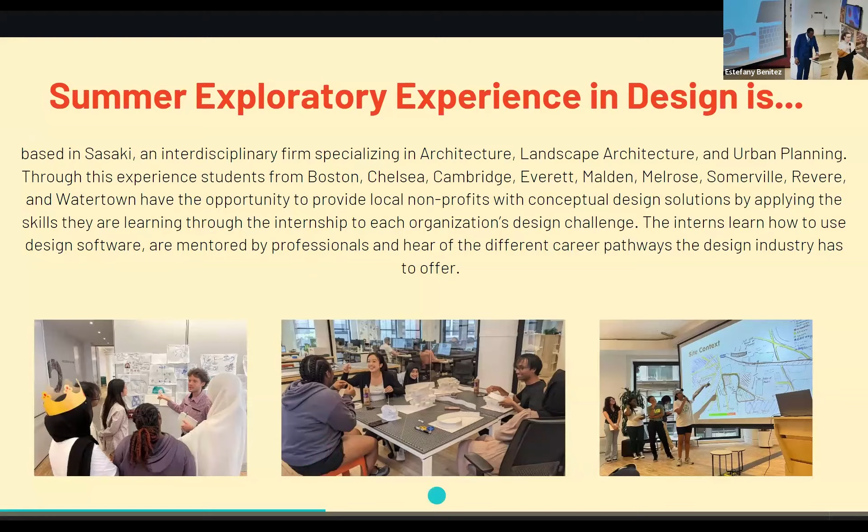I will say this one thing before we get going. You've put in 6 weeks of really, really hard work. The work is done. You have given the time, you've given your effort. I expect many of you, maybe a lot of you, are nervous right now. That's okay, that's good. It means you care. It means you're passionate about what you've done.

But I want you all to know, when you get up here and present your ideas, this room is full of people excited for you, and we are here to celebrate all of those ideas. So let's take a collective breath and let it out, and then you're all going to crush this. I'm really excited to see everything that you've thought up, and just know everyone here is cheering for you. So good luck, and I'll hand it off to Estefany.

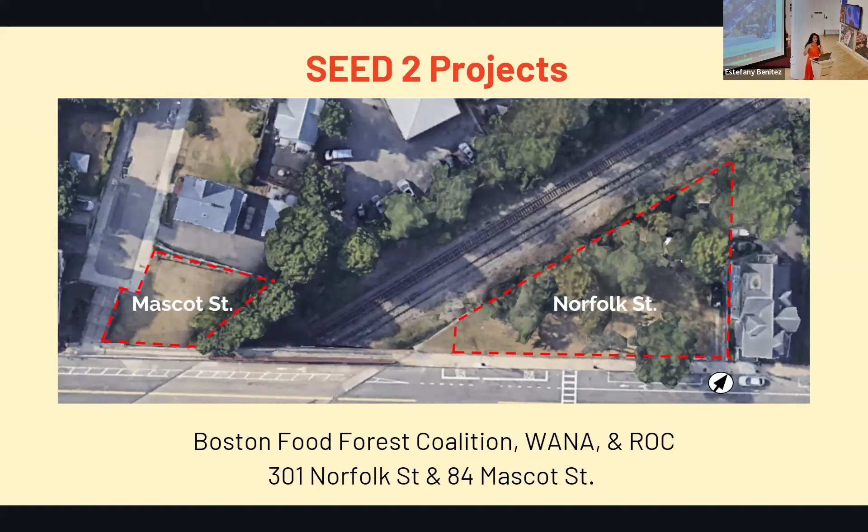For SEED 2, we were working with Boston Food Forest Coalition, WANA, and ROC on a food forest that they've already done plenty of community engagement for. So the students took their design and took it a step further. What you're going to see from the SEED 2 students is a more advanced and amazing design, bringing to life what the community had asked for.

The project advisors that helped here are also professional designers, architects, landscape architects, and urban planners who have worked here at the firm for many years and are super enthusiastic and excited to work with our youth and teach them everything they know.

Without further ado, we're going to move on to the presentations. I'll have Alexis come up and set them up. We're going to begin with Team Marigold. So may Team Marigold make your way up here.

Good afternoon, everybody. This is our final presentation for the 7 Acre Park. We're Team Marigold. My name is Amelia, I'm from Everett and a rising junior. Hi, I'm Emma, a rising sophomore from Malden. Hi, I'm Jasmine, a rising senior from Somerville. I'm Nee, a rising sophomore from Boston. I'm Felix, a rising junior from Cambridge.

A little bit about our site: before it was a dog park, it was used to repair and make World War II planes. So the soil has a lot of contaminated soil, heavy metals, and chemicals. There is a soil cap 4 feet under the soil. A soil cap is basically a tarp that lays between the contaminated soil and the clean soil, keeping them separate.

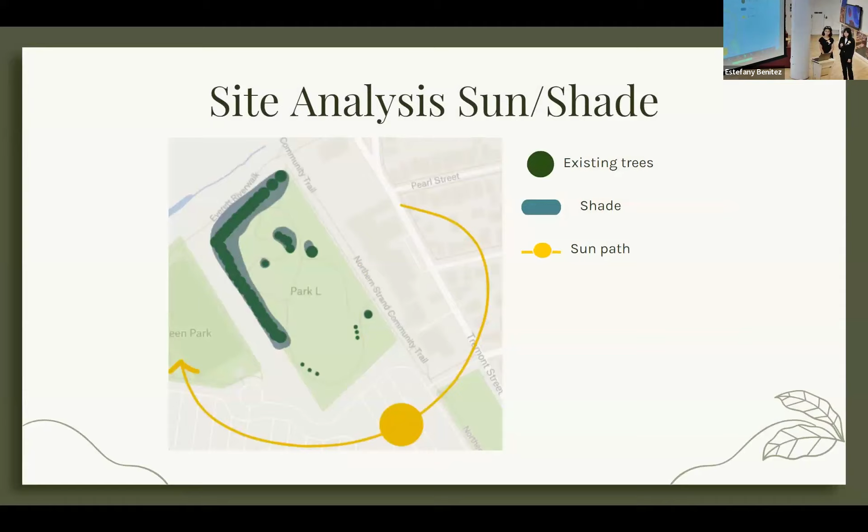For our sun and shade analysis, as you can see, the existing trees don't provide much shade for the park, and the park gets a lot of direct sunlight all day. This is a big reason why people don't want to come to the park.

Using our analysis, we created a design that will hopefully address the problems and goals that we found.

We're going to add 3 new pavilions in the park. The big one in the center, shaped like a dog paw, is our community space where people will gather, host events, and connect with each other. We're also going to have two small pavilions on the side, which are more private areas to sit and relax. On the other side, we'll have a big fenced area for unleashed dogs, and leashed dogs can walk on the rest of the park.

We're going to add two new entrances, one leading to River Green Park and one leading to the parking lot, for easier access to the park. We're also going to add a rain garden to help with the flooding. Overall, we're also going to add more amenities like more trees, more benches, more water fountains, etc.

This is our paw pavilion, which is our central community space. We wanted it to be made out of materials that were durable and would hold up outdoors. So we used oak wood for the base and the roof of the pavilion, and for the outside walls we used aluminum, which is also used for the pillars.

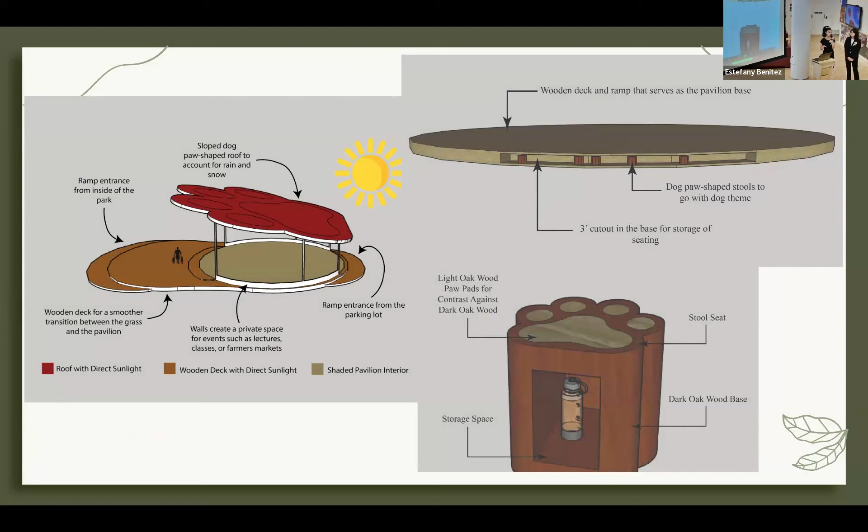At the front of the pavilion, there's a ramp that's also an entrance, so there's a smoother transition between being on the grass and being under the structure. The roof is also sloped so that rainwater can easily flow off of it and it provides more shade. At the base of the pavilion, we have a cutout storage space used to hold dog paw stools that we plan to use for large events in the pavilion.

This is our smallest pavilion. Although it is the smallest, we still wanted it to have a cozy, open feeling. As a whole, we wanted to add more green space to our park, so we added some greenery in the actual pavilion. All the pavilions will have a slant to deal with weather conditions, and this is what we envisioned the furniture to look like.

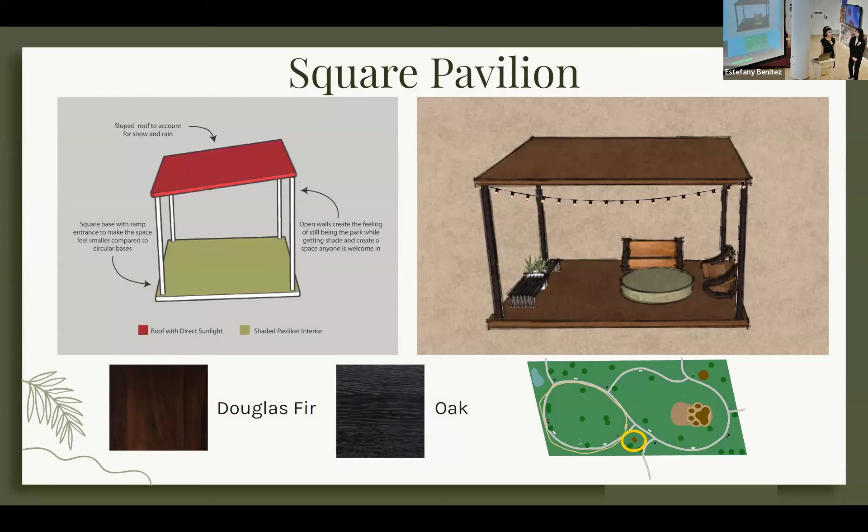For our pavilion structures, we want to connect the pillar to the roof and base using steel plates and screws. This will allow the pavilions to be sturdy and resistant to weather conditions.

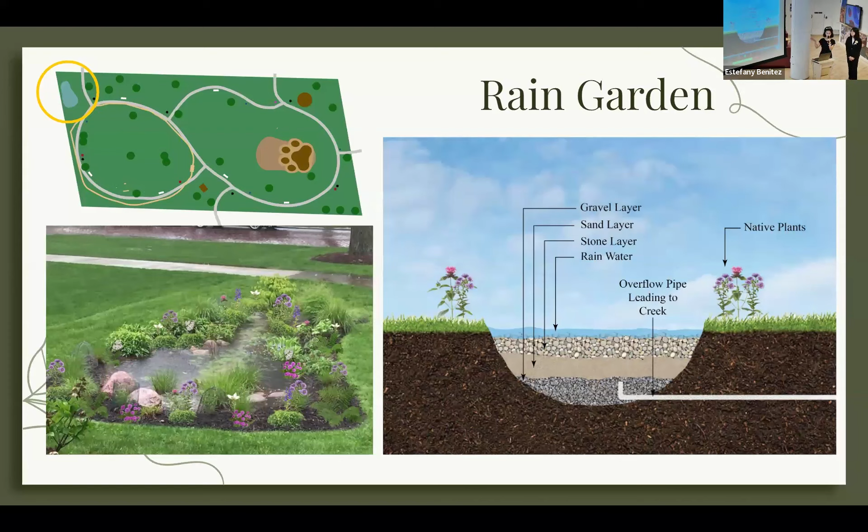To help with the flooding, we want to have a rain garden in the park with 3 different layers for the water to filter through. The rainwater will go through all of these layers and catch a lot of the minerals and chemicals that are in the water. We also have a pipe that leads to the creek for when the water doesn't filter through quickly enough.

We also wanted to improve the existing amenities, such as the trash and recycling bins, to decorate them to better represent the park's audience. And we want there to be facts on the side so it's more than just walking up to a trash can and throwing something away. You're also learning something. And then we want to add more water fountains around the park.

So when choosing the trees, we wanted to make sure they were completely harmless to dogs. We also wanted them to be native to Everett. And we also think that they bring in a good amount of shade and a good amount of color into the park, which is needed.

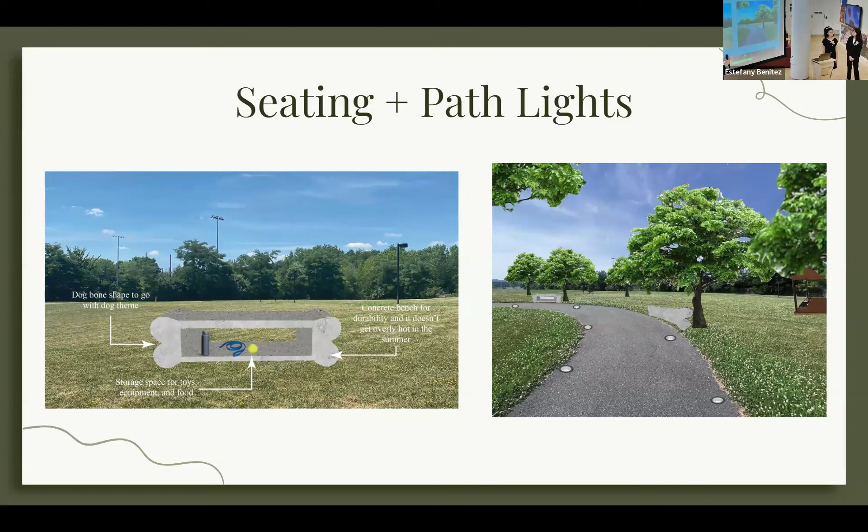So we opted for something more like concrete so they don't get as hot. We also wanted to add storage to the benches so people could put anything they wanted for themselves or for their dogs while they're at the park. And we also wanted a place for people to sit that wasn't the pavilion, so they had an alternative. And for the lighting, we opted for lights in the ground so people could walk in the pathways even when it's dark out.

Team Marigold hopes our design becomes an inspiration for the future redesign of the park to make it a better place for all the people of Everett who wish to visit. Thank you for listening to our presentation.

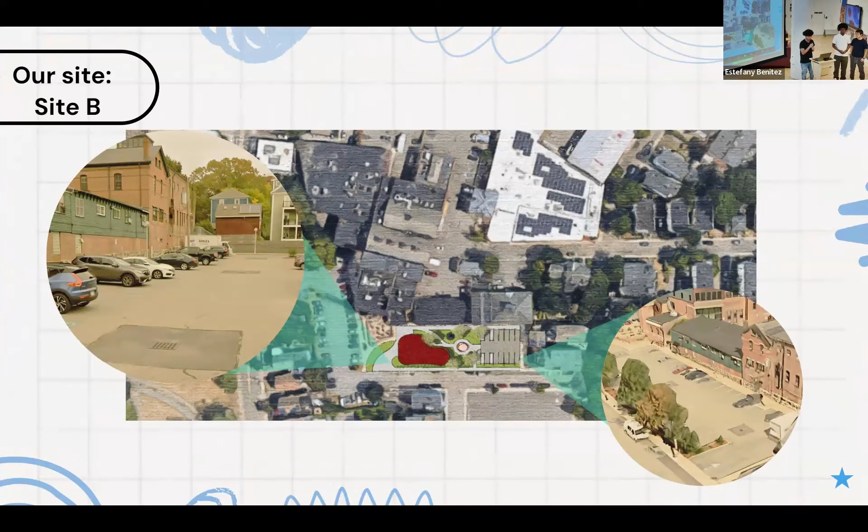Okay, so after our visit and site analysis, we believe community space, greenery, shade, and seating could improve the site in a great way, but also it would answer everyone's needs.

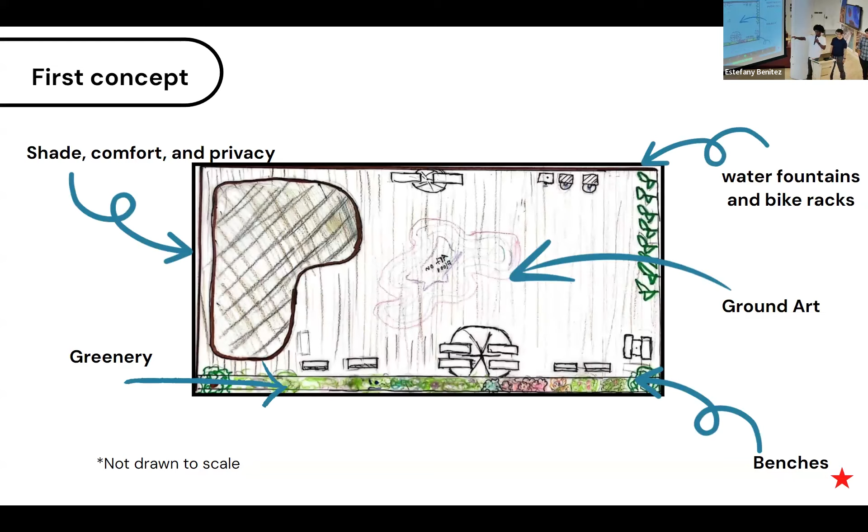All right, so this is our design concept, and we made sure to implement the needs into it. For shade, we have a pavilion. For greenery and color, we have floor art and trees and flowers on the side. And for seating, we have benches.

Community feedback: the first day at work, we visited the JPNDC site, and the employees there requested that we keep most of the parking because there isn't much parking around the site. Two weeks later, we got community feedback from the residents there, and they requested a community space where they could hang out, have shade, and a quiet place. So to accommodate both parties' needs, we kept 30% of the space for parking, and we used the rest for community space.

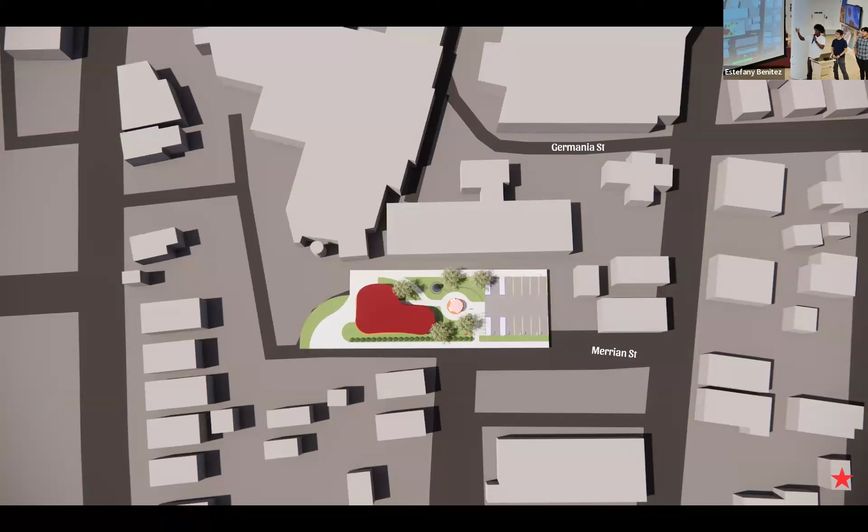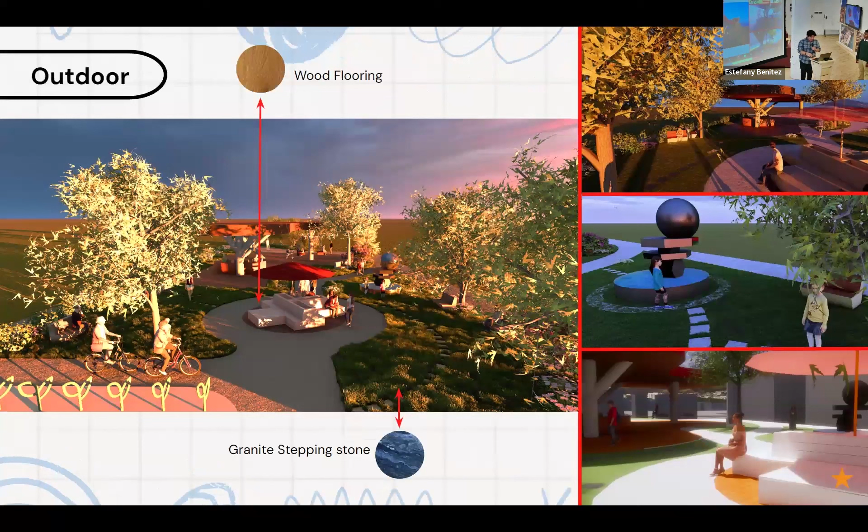For outdoors, as you see in the center, we're gonna have wood flooring and granite stepping stones, both for the same purpose as the pillar and roofing: durable and water resistant as well. Again, you see some pictures on the right of how people interact with the site, including children and adults, just showing you the variety of people that are gonna be on our site.

For our vegetation, we had to keep into account that the plants had to be low maintenance and survive in various weathers. We wanted to have some flowers to add a welcoming feeling for our site, so those flowers consisted of lavender, tulips, and daisies. We also wanted to have some shade around our bench areas, so we added some white oak trees and maple trees. And lastly, we wanted to have some bushes to bring aesthetic to our homely feeling, so those bushes are going to be evergreen rounded bushes.

We wanted to add some art to our site, so we had a fountain. It's an infinity fountain, and we got our inspiration from the Armenian Heritage Park on the Greenway. The fountain will be powered by solar energy; the solar power pump will be pumping the water through the fountain and out the planter on the top right. The fountain will also be made of aluminum to create a reflective, mirror-like surface.

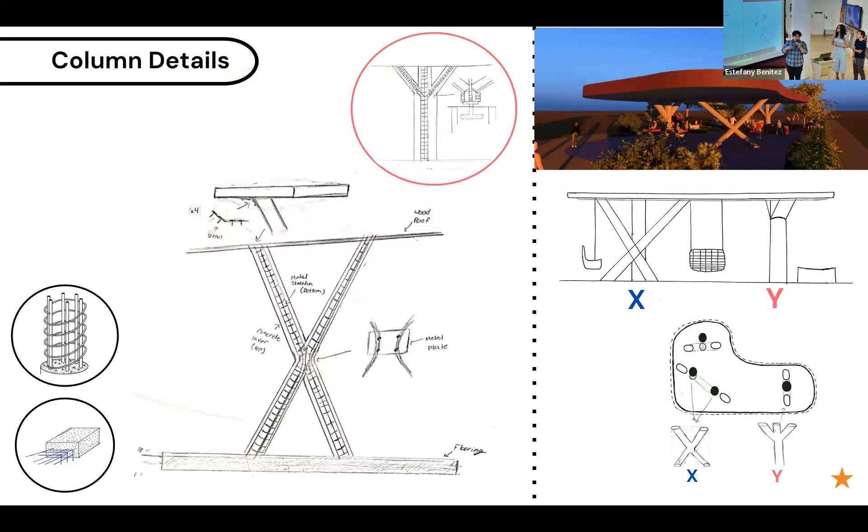Going back on the pillars, bear with me, it's a little difficult to explain, but both pillars are gonna have the same thing on the inside: a metal skeleton with a concrete layer on the outside. For the X-style pillar, there's gonna be a metal plate holding both of those metal skeletons together—they're not quite touching, but they're relatively close. On the right, we call that the Y-style pillar, just because of its shape, and it's also gonna have a metal plate holding the metal skeleton together, but a little bit differently, with screws and many other things that hold it together.

The solar panels are going to be placed on the roof of the pavilion above the X and Y columns, so that the wiring can go inside the columns and onto the outlets so that people can charge their phones.

We will also be potentially using the energy to power our water fountain. The water fountain detailing is made out of metal, and these diagrams show what they will look like on the site. They also meet ADA requirements.

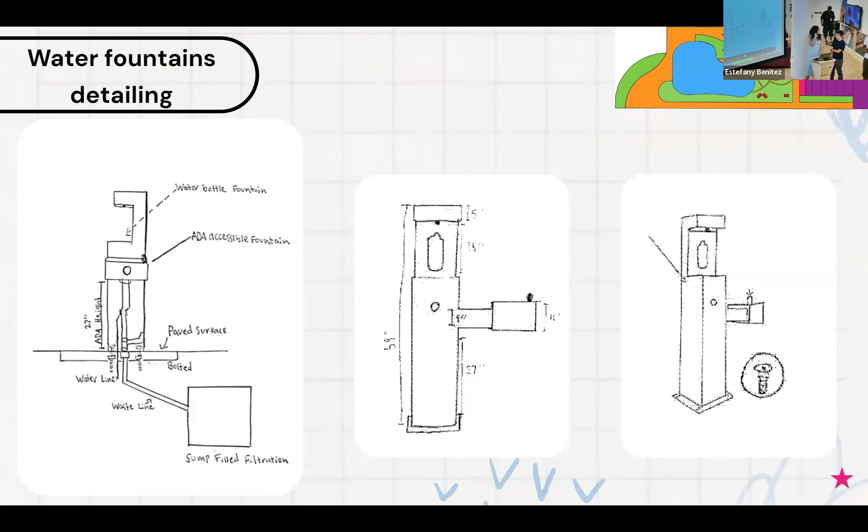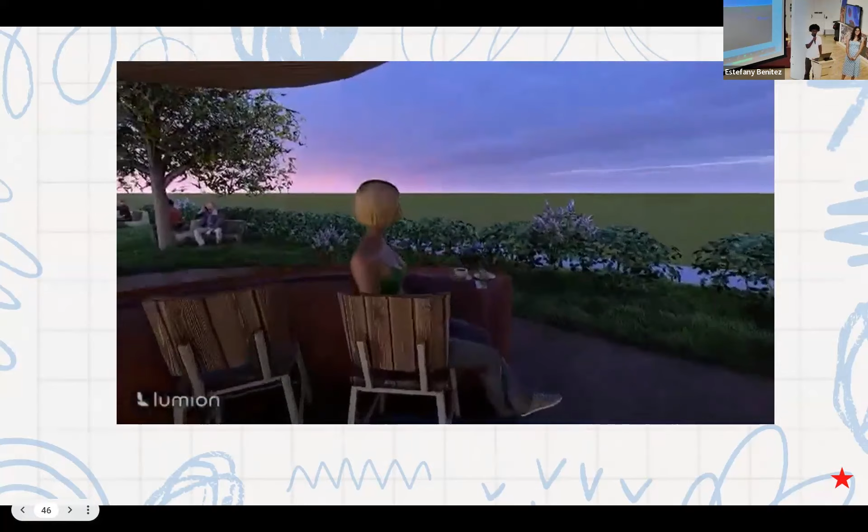This is the JP corner and what the JPNDC could one day look like. For the past 6 weeks, we've been working very diligently on this, and we're very proud of what we have made. We would like to give a huge thanks to the Sasaki Foundation, Jimmy, and Estefany, and most importantly, our TA, Jaritza. Thank you.

That was incredible, my goodness. Is there any feedback? I know our JPNDC partners are online, so feel free to unmute when you're ready.

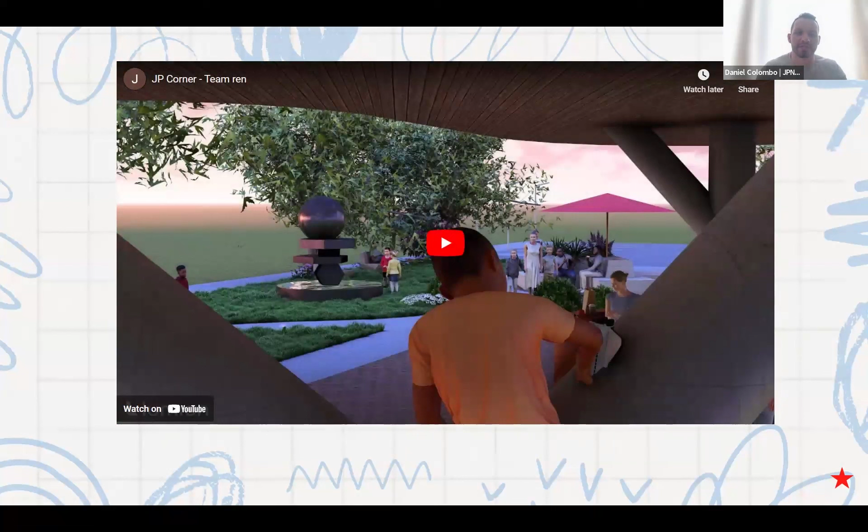You guys have really blown us away with some of these concepts. We gave you a task of making designs and concepts that would be transferable around the brewery, and I think the biggest thing you guys really hit on was making good concepts that could be placed all around our 200,000 square foot complex. Maybe not necessarily at site A or B, but these are designs we could maybe implement in other areas or other aspects of our portfolio.

I think you guys hit the nail on the head with community feedback. When I looked at the survey responses, a lot of it was outdoor seating related, pathways and landscaping. So great job — you took the feedback from the community and brought it to life. Kudos.

I definitely want to echo Daniel's feedback, and also recognize how difficult it is to create a space that meets the needs of different types of uses. I think you guys have done a really excellent job thinking through the different uses and how all of those would interconnect.

I love the incorporation of solar into the roof of that space. It's really exciting to see the potential — we see this building every day and we just see what it is, and it's really nice to see what it could be. For me it's a good reminder that there's space and work that can still move forward. So thank you all.

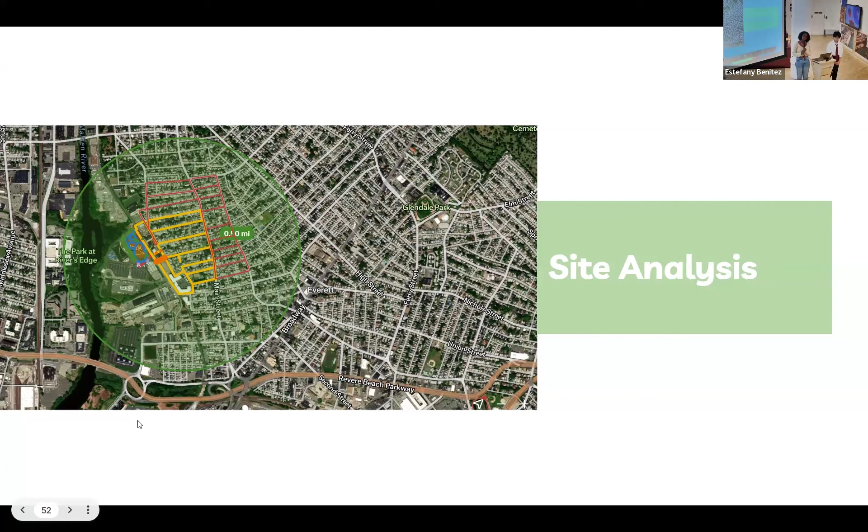This is our site analysis. Our park is located in Everett, Massachusetts. As you can see, there's a big residential area on the right side and a river to the left.

This is how you get to the site. Our site currently has 2 main entrances with a desired path in the corner from the parking lot. In green, you can see how the shading of the trees on the site looks.

And you can also tell it's going to be really hot because there's little to no trees on the site. This is the flood diagram, showing what the site looks like under 5 feet of water, which is happening more frequently due to climate change. Our site has little to no drainage, making it really flooded.

So this is the utility analysis. These are the utilities present at the park right now. We have metal benches that would heat up during hot summer days so that people cannot sit on them. We also have metal trash cans that emit a foul smell due to how hot it is.

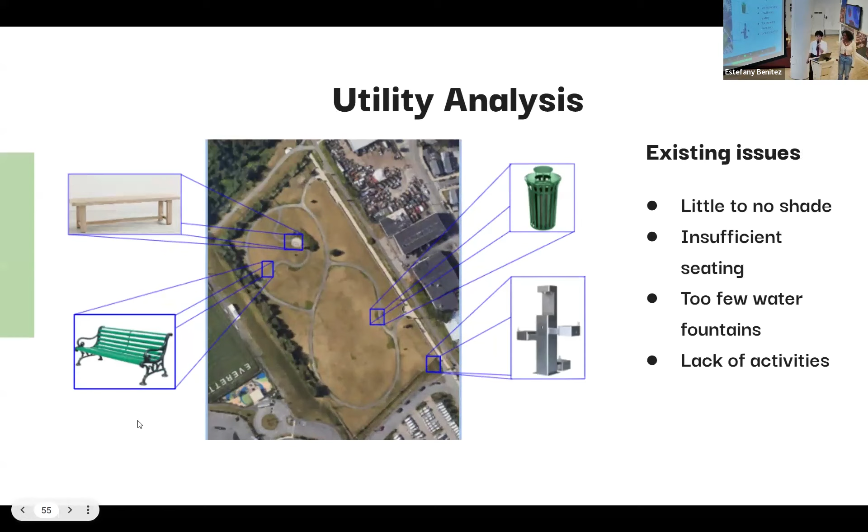We have a water fountain that is not within the park, therefore not accessible at all, even though it's a dog park.

Here are the pictures we took when we first visited the park. That's me right there on the left bottom corner. I almost had a heat stroke, but I'm glad I'm here with you guys today.

This is our new design concept. We have 3 sections: dog park, activities, and human area. The dog park will be unleashed and fenced, and the 2 other zones will be leashed zones for dogs.

During our design progress, we first initially designed the park to have a lot of pathways because we thought that would be more convenient and accessible for people. But as we moved on with our progress, we decided we don't want as much pathway and we want more green space for the people of Everett, because most people there are blue collar workers and would have a lot of green space to just enjoy and relax themselves.

Here is the final plan view of what you can see during our design.

This is our color palette. These are images that we took inspiration from.

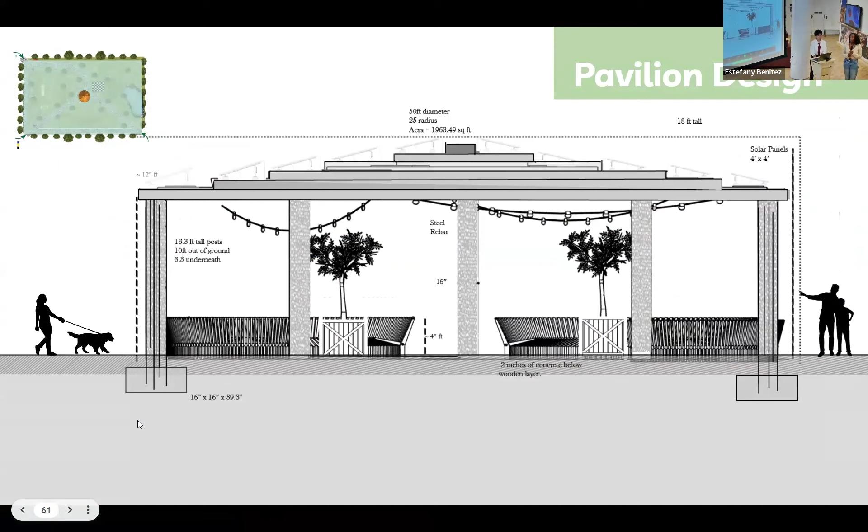These are some renderings. These are dog equipment, because it's really important for dogs to have activities to do.

So this is the rain garden that we made on SketchUp. This is what you can expect to see at the rain garden. It has a depth of around 3 feet, which would not exceed the 4 foot cap that existed. And it's built like this because it acts as a staircase.

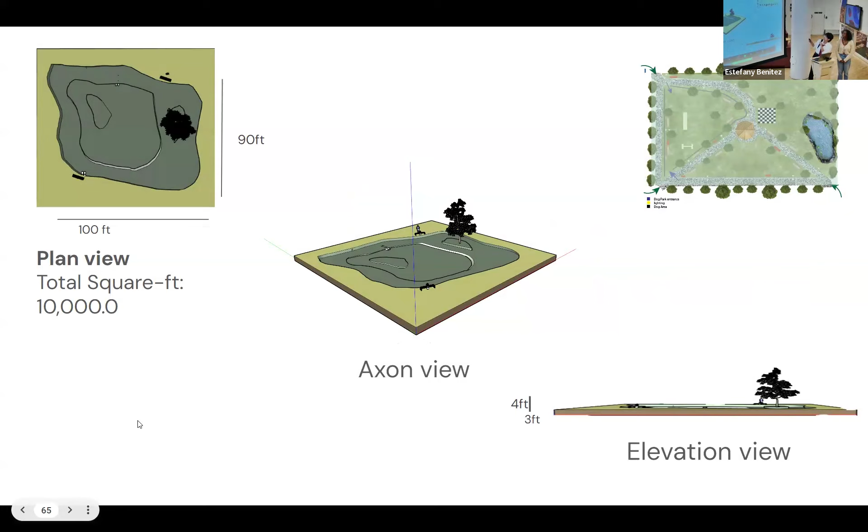When the rain garden is not flooded, people can just walk in there and enjoy the scenery of the rain garden itself with the flowers around it. As you can see, it's located in the corner right here.

This is the under drain system for the rain garden, but due to time constraints, I won't be able to talk about it, so you can ask questions on it. This is the layers you can expect within the rain garden. It will help filter out water so that we can put clean water back into the creek.

Here are the 3 main flowers you can expect within the rain garden: swamp milkweed, May sedge, and Aster. These are 3 native plants and they can all increase biodiversity, as you can see.

These are the 4 different types of trees that we wanted. We wanted them to be native to our location. They all range from 15 feet to 100 feet. They can all grow in the soil that 7 Acre has. This is the blooming schedule.

This is some renderings.

Here we have the designs we chose for different assets in the park. We have the waste bins for the dogs to promote cleanliness in the park. We also have the trash cans. We chose this design to promote sustainability in the park.

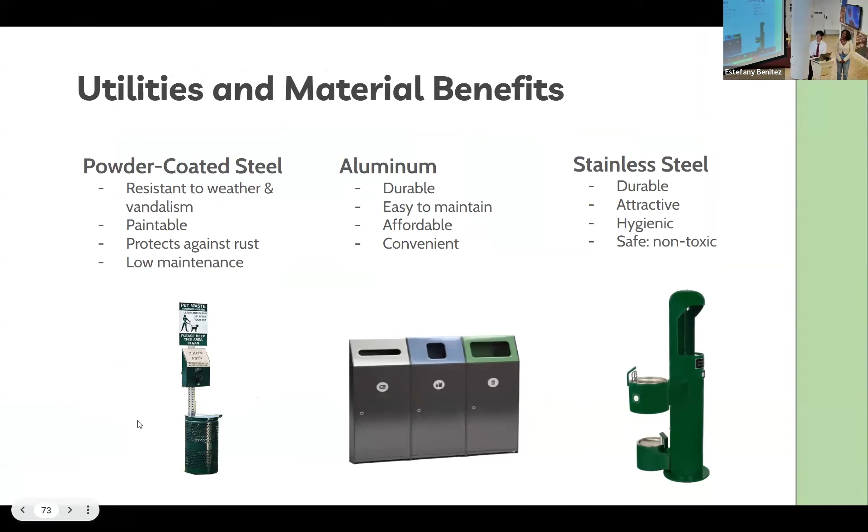The water fountain we chose because it can be used by both dogs and humans. Here we have our lights. We chose them because there's not too many lights in the park currently. We also have our giant chessboard, for which we chose mosaic flagstone.

Here we have our benches. We chose cedar wood and stainless steel because they last longer and wouldn't heat up as quick as other things. The ones for the grass would go in different areas in the grass.

Here we have a rendering of the chessboard. So these are the locations of where you can expect these amenities to be. The giant chessboard's purpose is to attract people so they can just play on it.

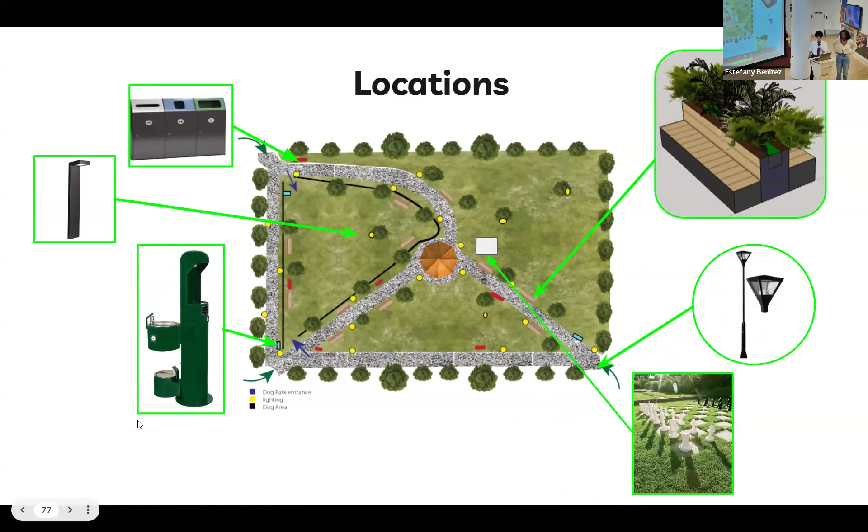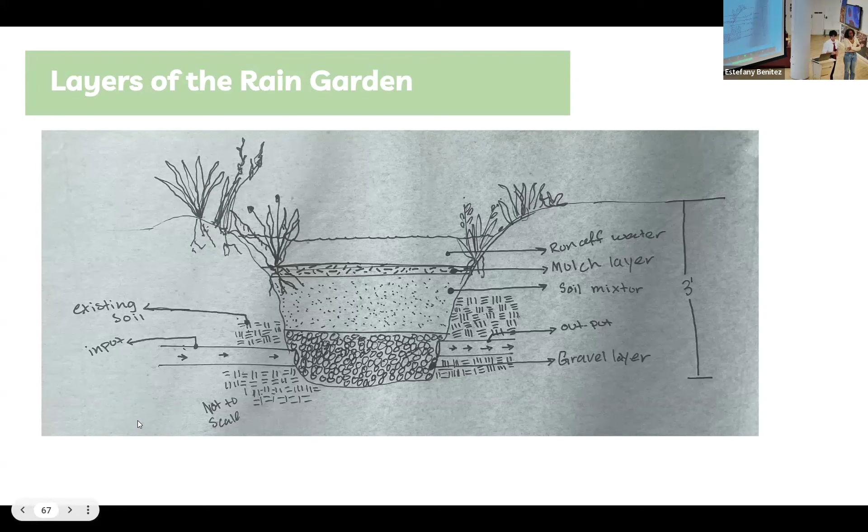Great, thank you. I also want to mention you guys have done a good job on the drainage. That area, with the climate change we have right now, is not only hot most of the time and unusable, and people gather under the one shade tree there, but there's also major flooding in that area. I'm glad you guys took that into account.

And with climate change, as you all know, the temperature's heating up. We get more dramatic rain, historic rain flow, and more concentrated rain flow. So it really comes in and fills up quick down there and makes it unusable. So thank you, it's a great design.

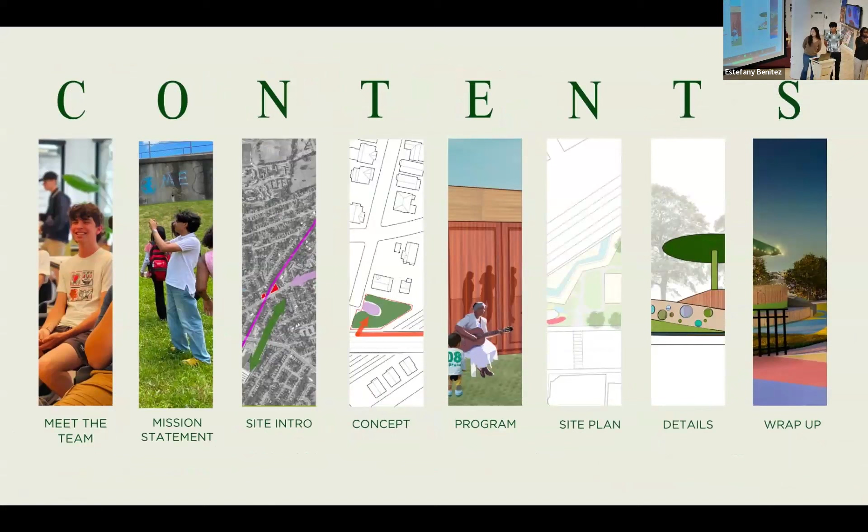With the vibrant community of Dorchester, we wanted to create a space that nourishes biodiversity and curiosity. Featuring an adaptable design, we hope that our food forest will promote communal connections and sustainable practices.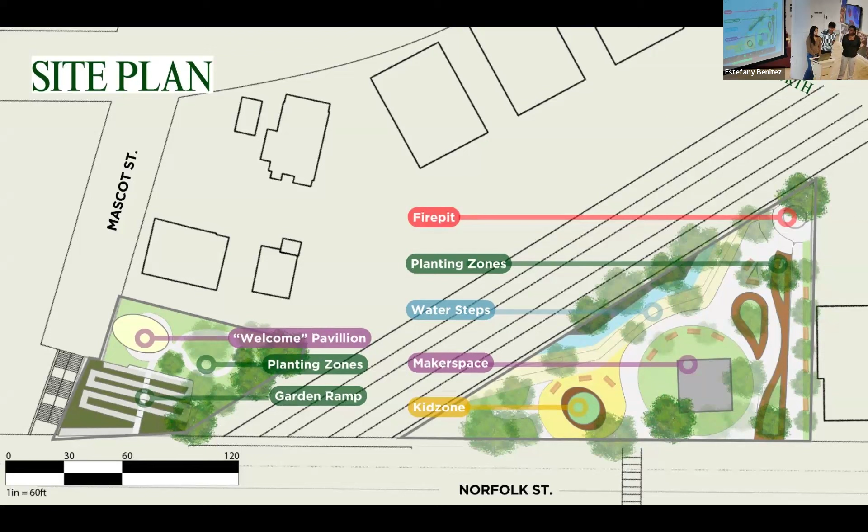So moving on, the food forest is meant to provide for the community, but we wanted to choose foods that would benefit the surrounding population. According to WBUR, there's a large Caribbean population in Mattapan, so we tailored these ingredients to the main things found in those cuisines.

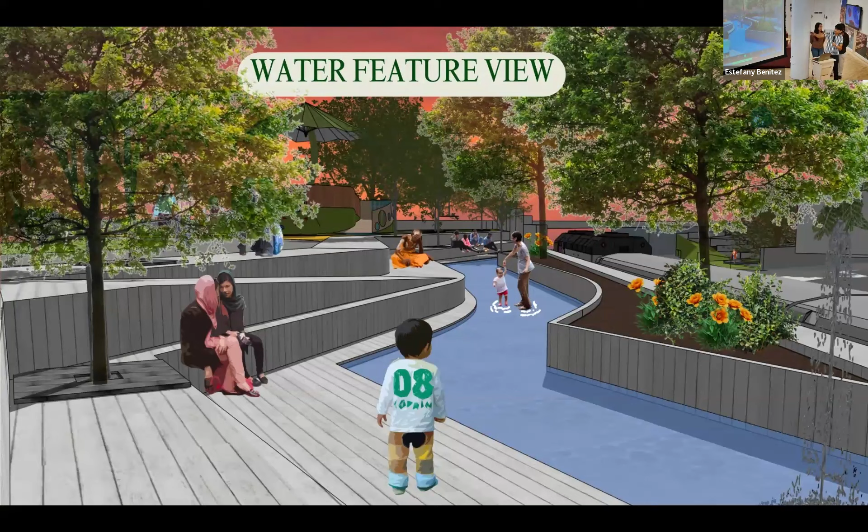Looking at the material aspects, we want to focus on materials that are very sustainable, multifunctional, and engaging with our site. For example, the pebble mosaic floor is multifunctional and can be used both when there's water circulating and in the winter when there isn't.

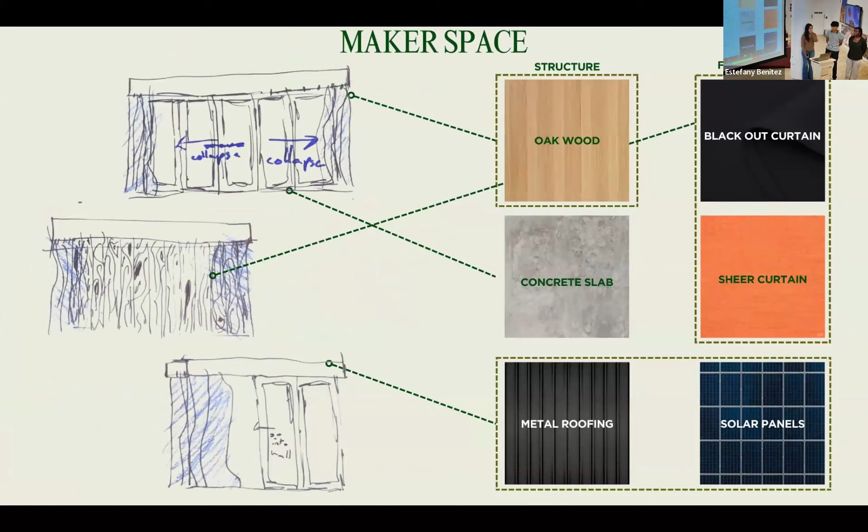Now moving on to our second feature, the makerspace. This is a simple structure with solar panels on the roof to fuel and source power for events held there. We're thinking of a two-curtain system that will allow the community to play with the facade, one being more opaque, one more sheer, allowing the space to be used more formally or informally, whether for events or just hanging out in the park.

Next we move on to our kid structure. We were inspired by the concept of age tree rings, bringing it back to the motif of nature. We mainly want to focus on sound, music, and touch, which is why we have a variety of different materials as well as programs within our structure, like a learning wall and turf rock climbing.

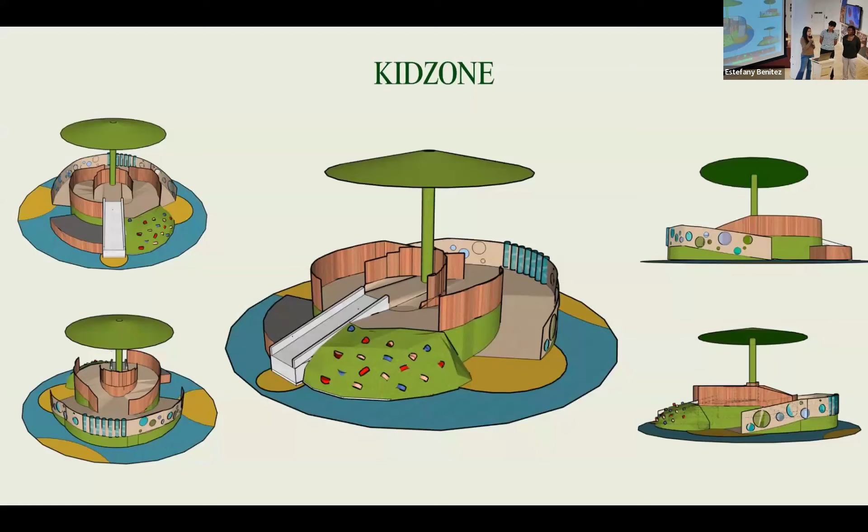Moving on, one thing we noticed with the Mascot Street site is that it's very open, so there's no shade. We decided to fix that with a welcome pavilion, a very open and flexible structure made with steel that resembles a Pringle.

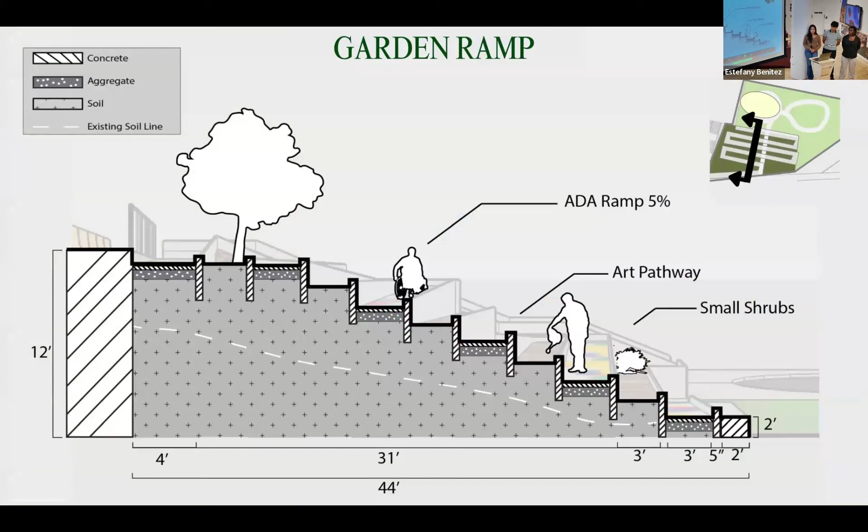Looking at the section cut, again the ramp is ADA accessible, and it's also going to be covered with art, so it can connect the two sites together. The white line represents approximately where the soil is today, so you can see how the ramp solves the accessibility issue.

Going back to our two major points, which were community and vegetation, I want to focus on a statistic that states 20% of people within the surrounding area, including Mattapan and Dorchester, are food insecure. We hope to tie that back into our project by providing fresh vegetables, and 150 community meetings have been held in the area.

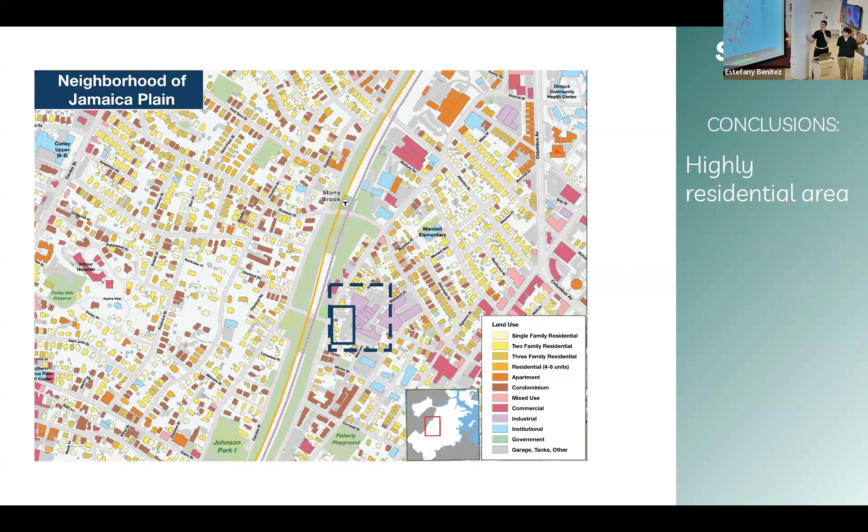This is a map of our site. As you can see by the dotted line, that is the JPNDC as a whole, the building complex, and in the smaller box you can see that is our site, called Site A. It's a highly residential area with some institutions and some commercial buildings. What we plan to do with that information is have these people come in and have this space that their neighborhood may lack.

Upon our visit to the brewery, there were three very glaring issues with Site A: the primary ones being an obvious lack of shade, seating, and signage. The shading was an incredibly large issue because the heat was absolutely unbearable, compounded by the urban heat island effect, a phenomenon where the ambient temperature in an environment is elevated compared to others because of the amount of concrete and asphalt contained within them.

Due to the lack of seating, there were very few places to comfortably exist within the site, as most of the people who came with us were either forced to sit out in the sun, which again, due to the lack of shading was horrible, or sit on the wheelchair ramp's railing. Finally, the signage issue was painfully obvious from the singular sign out by the Armory Street entrance, which, with the very little advertising that the brewery has, made it incredibly difficult to attract customers, something that both patrons, businesses, and the inhabitants of the brewery all noticed.

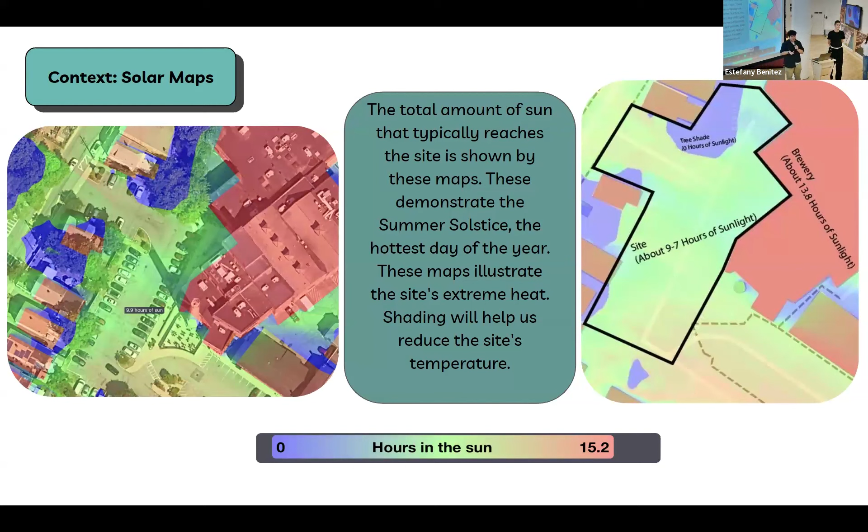For some context on the heat, these two maps show how much sun the site gets. They show that during the summer solstice, known as the hottest day of the year, the site gets about 10 hours of sunlight, and the building gets about 13.8, almost 14 hours of sunlight with little shade, which is a lot of heat.

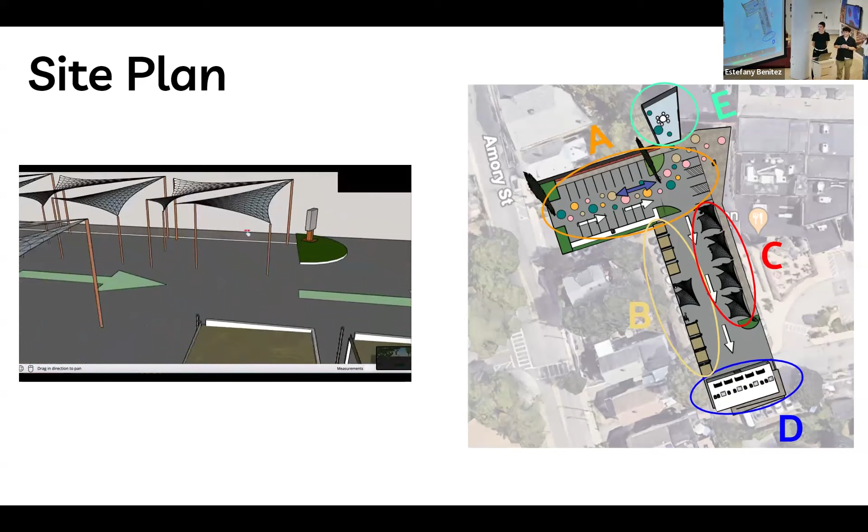B is our shopping district, if you will. Some small businesses are able to set up shop there. And the pièce de résistance - I'm not French, nor do I speak it - Site D is our greenhouse. It's just a nice, serene place to sit down.

This is an outlook of the site from the front of the greenhouse. While it is more cluttered than the parking lot stands now, there is still quite good visual clarity, and every important sector of the site is viewable from this area.

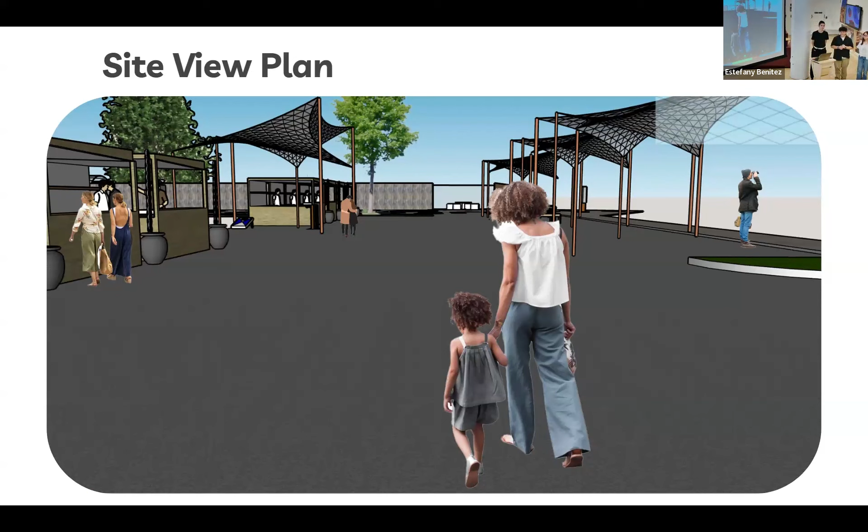You can see there's a cornhole game and people that are vibrant here. Across from the stalls at the seating, we have seating underneath tarps so people sitting can have shade.

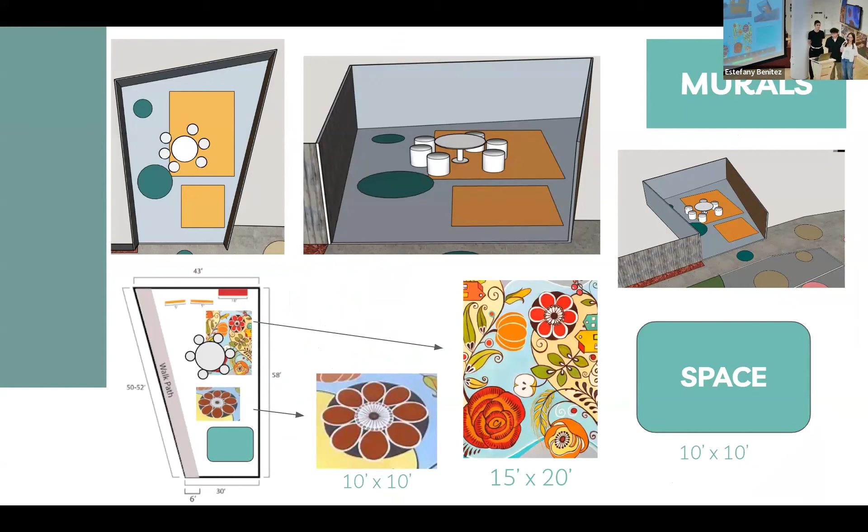And to combat the problem of signage around the site, we would like to have the first kiosk be a digitized format of every store that is at the site, which will be put at the front entrance of the site.

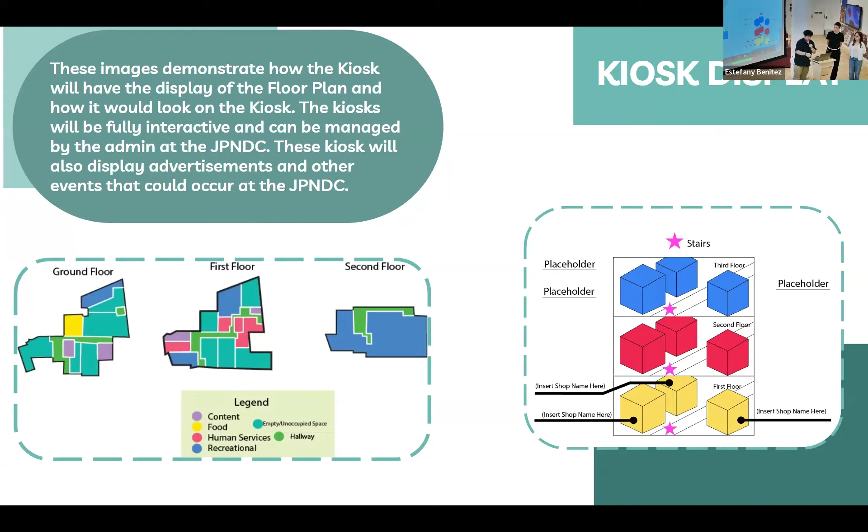And finally is a secondary wayfinding system adding on to the kiosks that Byron just presented. It could be either material-based or design-based. That is to say that each of these systems would involve either the construction of different paths using different materials or a decal applied to the already existing floor.

For the material base, each path would be constructed out of something different. You could use red brick, regular pavement, dirt paths, cobblestones, etc.

This is our project. We hope that it can help this community and further the lives of people who are so greatly affected by the JPNDC's work.

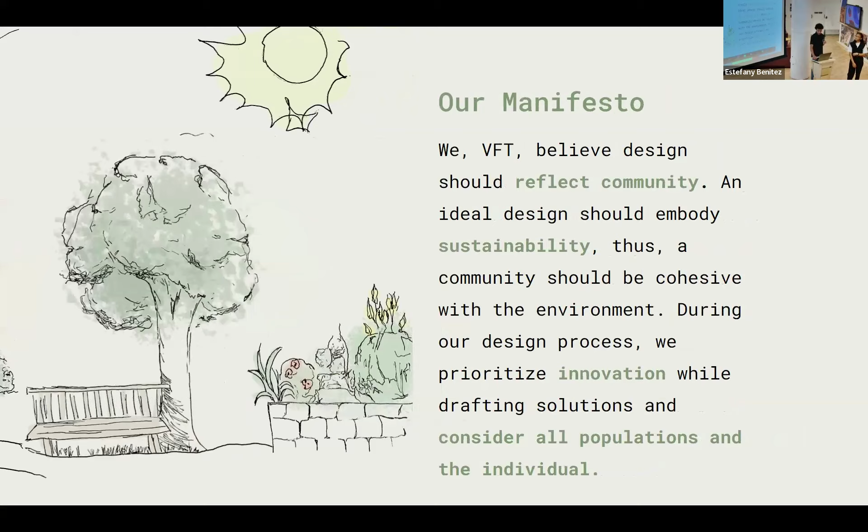So our site was previously used by the company General Electric as a dumping ground, and it was recently capped and opened to the public as a dog park.

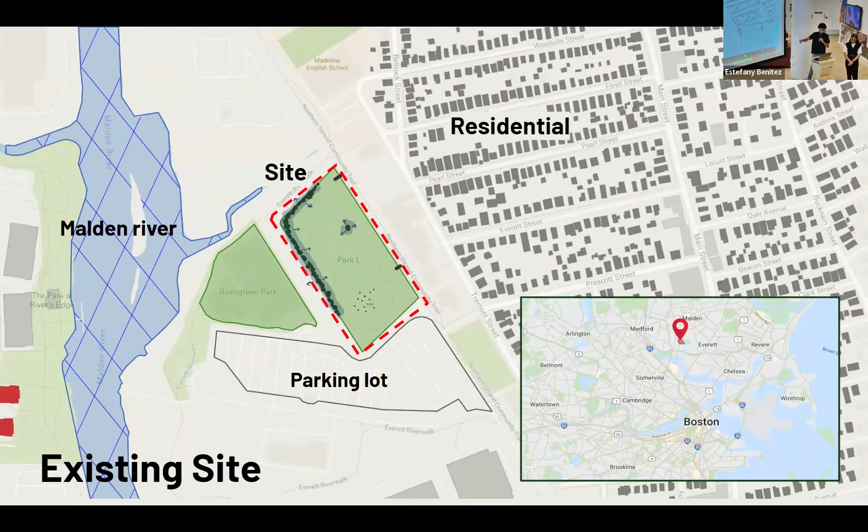Our site is located in Everett, in the Boston area. Up here we have residential areas with buildings and houses. Here we have the site, and right under that we have the parking lot and the Malden River, which connects to Rivergreen Park. Here are the current amenities - I know other groups went over this, but we'll breeze through it.

We have a serious lack of shade, as well as metal trash cans and benches that are very uncomfortable. In addition, we have a lack of amenities and recreational activities, as well as uninviting entrances and one singular metal water fountain that isn't even in the site.

Previously, the councilors decided this should be used as a walk park for people as well as a dog park for dogs. However, the community found issues such as people can't walk because the dogs are off leashes, and this proves a hazard. It's also difficult to get into the park due to snow and ice during the winter season. So our renovation of Rivergreen Park aims to provide additional recreational opportunities with improved comfort and environmental cohesiveness within Everett.

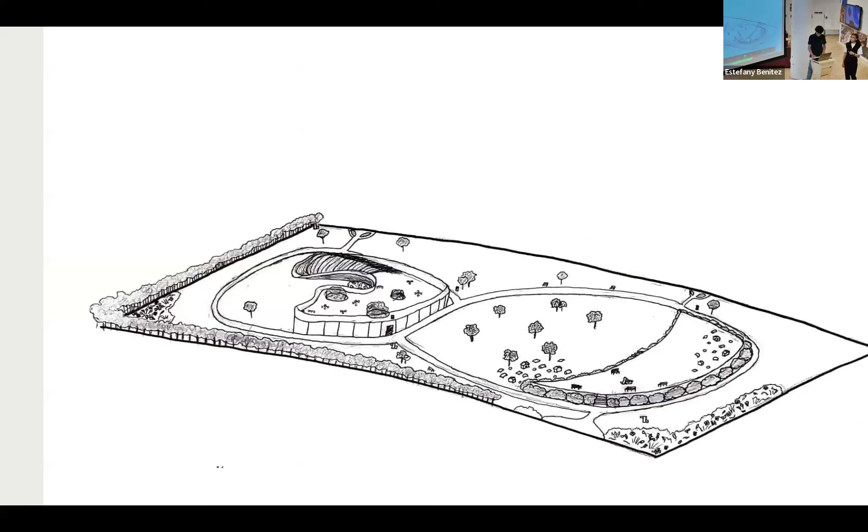The equipment - first let's take a look at the terrace. We wanted to create an area where people without dogs, or who don't like dogs, are still able to enjoy their time at the park. So we wanted to keep the pathways and elevate this middle portion, which can add some steps so people can actually access the top of it, and then platforms and a ramp for more activities.

And then finally, we wanted to hollow out the building so people can enter it, and add holes on the top of it so trees can grow out and sunlight can enter the building.

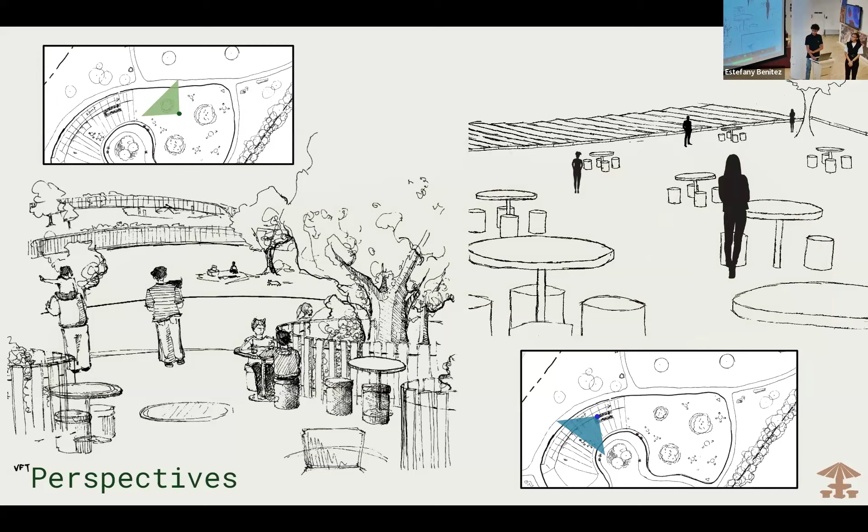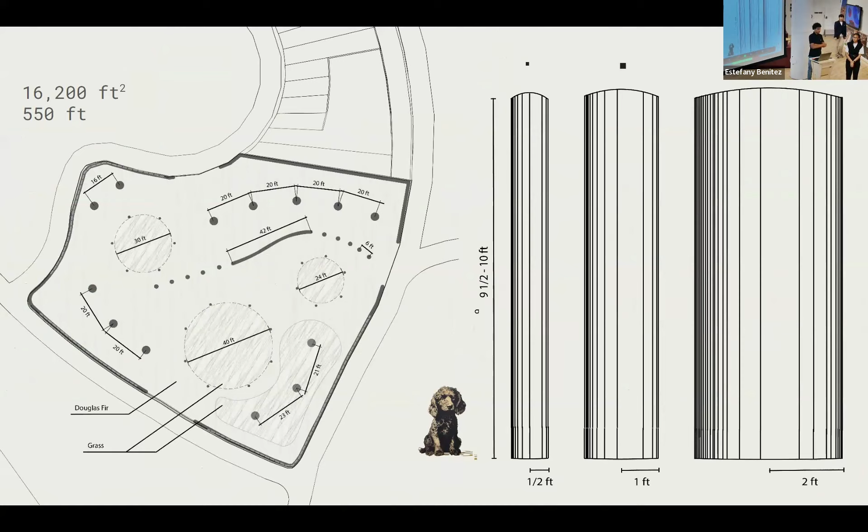This is another perspective view on the inside of the terrace. Looking into a tree, you can see a door over here. You can see a parent, maybe with their kid from the nearby school, interacting with the environment. This is also wheelchair accessible. And up there, you can see a person looking from the surface down to the bottom floor of the terrace, which shows how interactive the environment is.

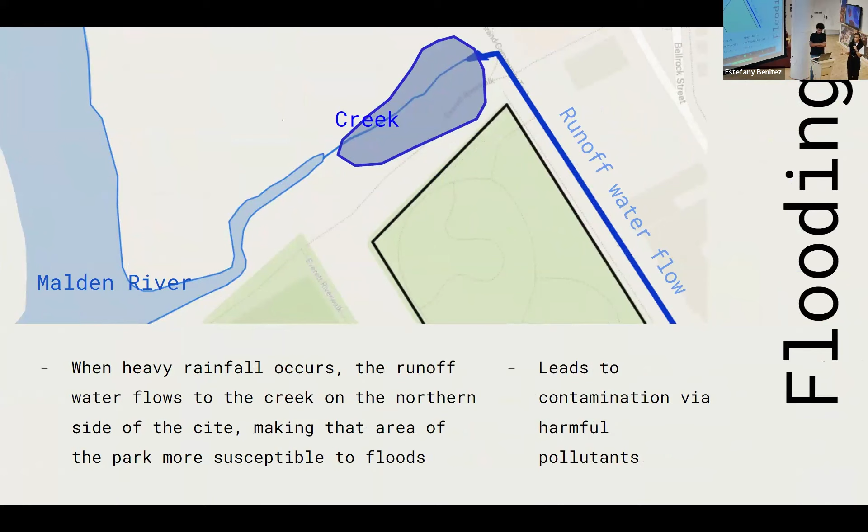Part 2, rain gardens and bioswales. As mentioned before, there is a flooding issue in the park, so to combat that, we created a drainage system.

The water that would have flowed through on the sidewalk will now enter the bioretention swale along the sidewalk. From there, it would move to the rain gardens, and it will wait there if the pipes are too backed up before being sent back to the river again.

So we've decided to use these bridges over bioswales that Sully can talk more in depth about. In addition, we'll have a total of 6 rain gardens, but this one in particular will have a bridge going across from it. It will help establish a more official entry and improve accessibility so that people entering from the parking lot will not have to go all the way around the site to enter the park.

To clarify, a rain garden is essentially a garden of native shrubs, perennials, and flowers planted in a small depression, and it usually consists of mulch, filter fabric, native plants, sandy soil, and gravel to catalyze the drainage process. It also serves to provide localized stormwater and flood control and improve water quality. It is low maintenance, preserves native vegetation, and attracts beneficial birds, butterflies, and insects.

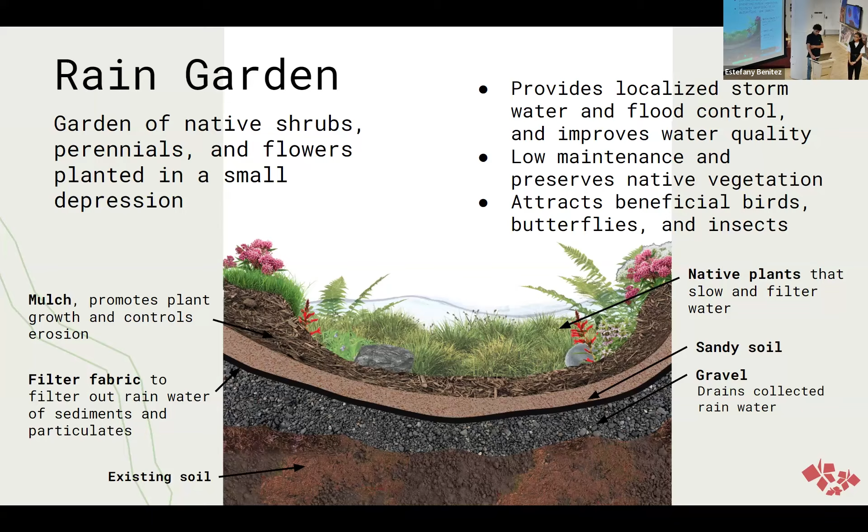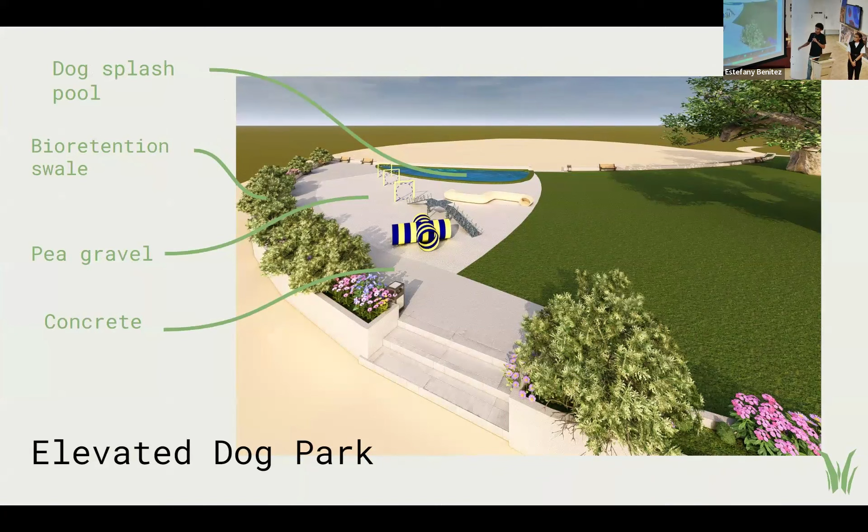So this is our elevated dog park. At the top, we have a dog splash pool for the dogs whenever it's a really hot day and they want to cool off. Right under that, we have the bioretention swale, which would be full of bushes and flowers. Under that, we have pea gravel, where our play equipment would be because it's safe for dogs. Then we have concrete right under that so people could sit and watch the dogs, or walk over and watch them. So this is our bioswale diagram.

Part 4, play equipment. We believe dogs should be safe and comfortable with the materials they're using, which is why we're going to use recycled plastic, stainless steel, aluminum, and treated wood. These materials are strong, weather resistant, and environmentally friendly, since other chemicals may be harmful for dogs. We're also going to surround the dog park with pea gravel, which is inexpensive, safe for dogs, and doesn't hurt their paws.

In conclusion, these 5 components make up our dog park, which would look like this. All 5 of these components are essential because they include a community with non-dog owners and also a community with dog owners, so that they can share one space at 7 Acre Park.

As you can see here, this is a terrace view where people can overlook the dog park. They can look at people playing around, people on their bikes, people with their dogs. They can also look below the building and see through the gaps within the fences. These trees provide great shade. Here is an underground view where they can see above, and people can bring their dogs in during winter.

As you can see here on the left, this is our elevated dog park. Wouldn't you just love to sit here and watch your dog play and cool off? In the middle, you can see that the park is easy to access by anyone. The rain garden is also appealing to look at, and it fulfills its purpose to drain the floodwater. So wouldn't you want to walk along the path by these beautiful flowers?

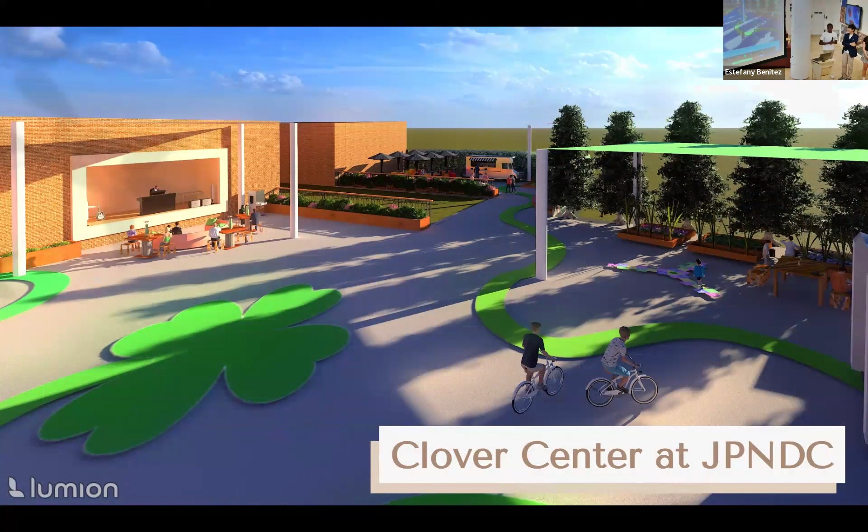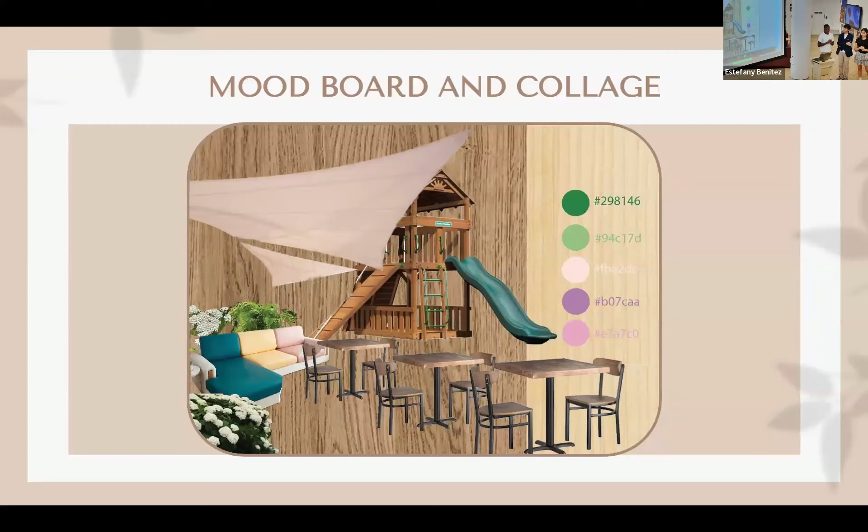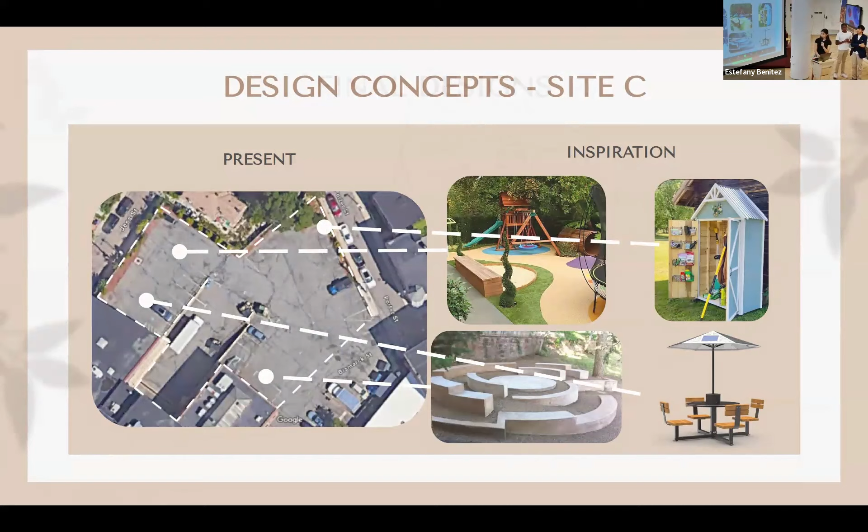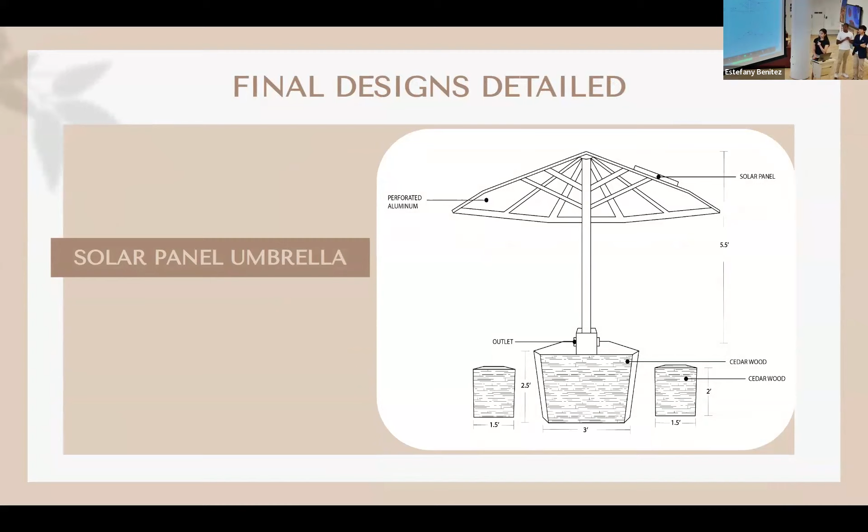The umbrella, the table and chairs will be made out of cedar wood, which lasts a long time. The solar panel is at the top right corner and will lead down into a control box with outlets where you can charge your electronics. The stage will have a roll-up door, which was already there, but we decided to keep it.

Walking a bit from Site C, you can find Site D. Site D is designed for more of a relaxing space and used for holding meetings. This is because the tenants and residents of JPNDC wanted a place where they can hold meetings peacefully.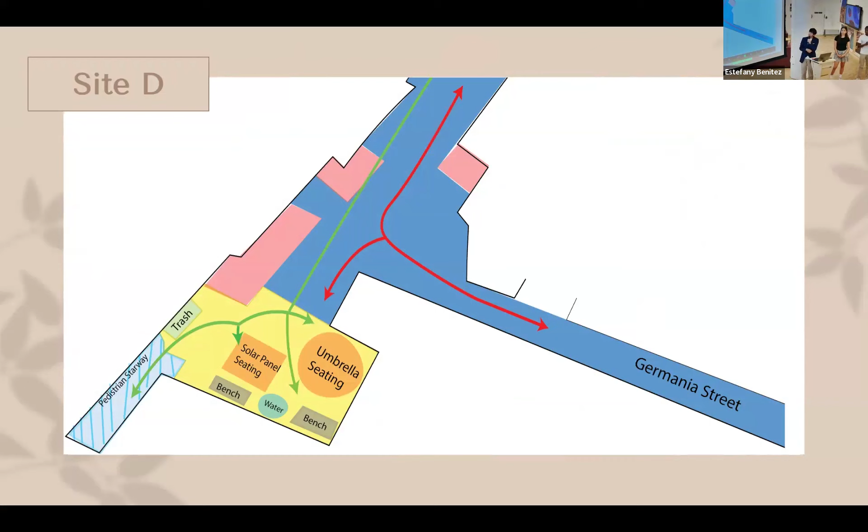This diagram shows the movement of vehicles and pedestrians. The red arrows are vehicles, while the green arrows show the movement of pedestrians and bikes.

Using the feedback, we decided to add additional rest areas, shading, seating, water stations, additional parking, and also additional trash bins.

The solar panel overhang can be used for charging your electronics, as said previously, and they're also good for lunch breaks. The Site D gate leads into Site D and makes the site more welcoming, more open.

The round bench seating is not only a place for relaxing, but also for lunch breaks and socializing.

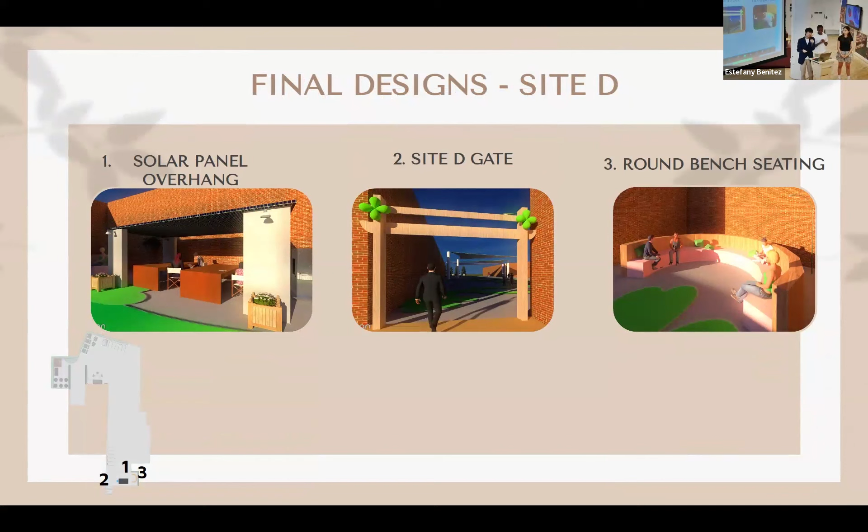The solar panel overhang is like a shaded area, and it has a solar panel on top with wires going down, connecting the solar panel to some charging outlets. There's a table right there, so you could sit at the table and work while your device is charging.

The round bench seating, there are 2 round benches, one in Site C in front of the stage and another one in Site D. There's cushioning on the inside, so it's comfortable to sit there, and the outer layer is woven polycarbonate.

As you walk around our site, we want to make your experience better, so that's why we decided to add other site add-ons.

Here we have water stations to prevent dehydration and make your experience better. We also added canopies since there was a lack of shade, and this will also serve as wayfinding as they run through both of our sites. We also have trash cans to promote good habits and keep Clover Center as clean as possible.

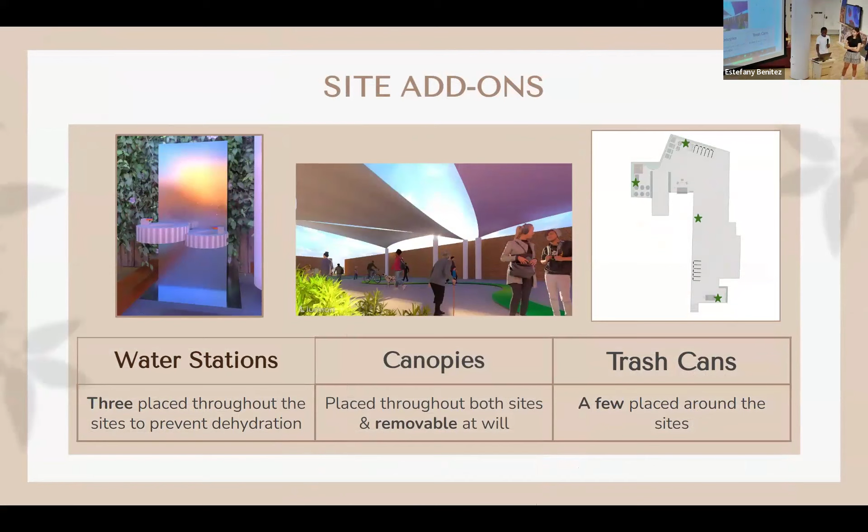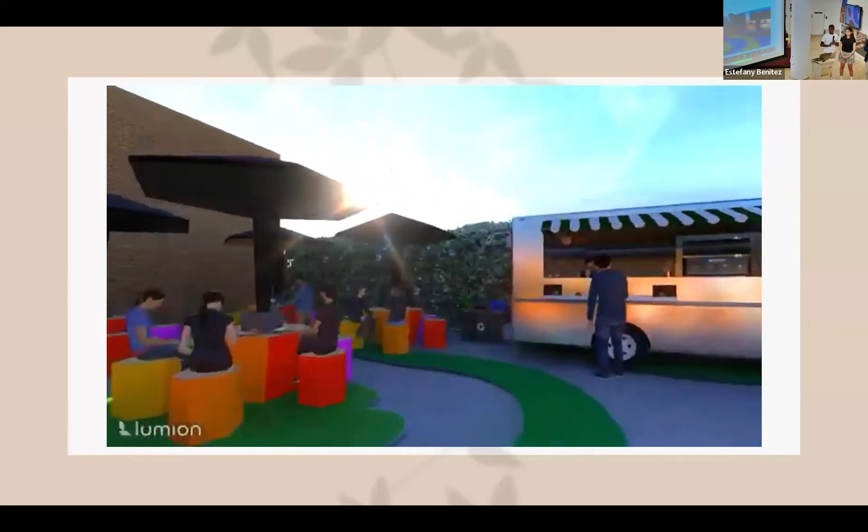So we enter the gate to see Site D, people working and enjoying their break. We follow our Clover mural to the performance area as people watch and enjoy a show. Right next is our rec center where people engage in many activities. But right around the corner, we can watch as people eat, enjoy food, socialize, and pick your choice of food from our food truck. And of course, you can leave the kids in the playground while you take a break. And we thank you for visiting our Clover Center.

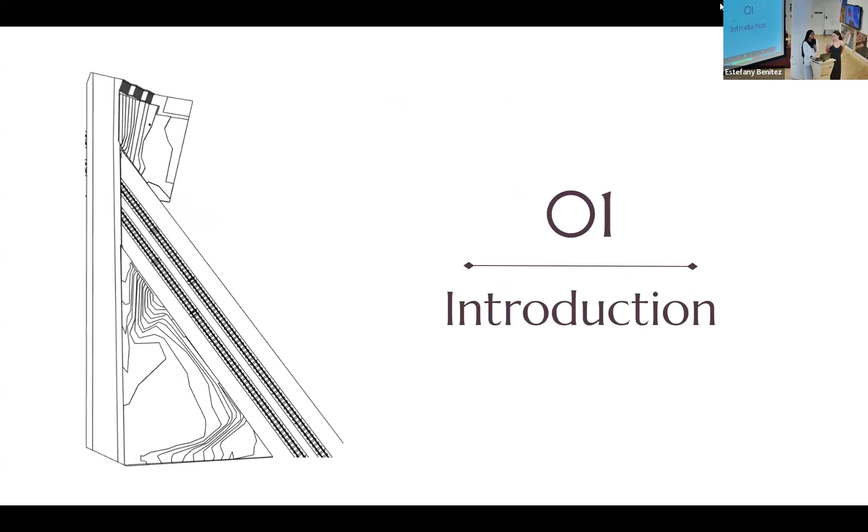So starting off with our introduction. Our task was to design a food forest in Dorchester. Working with 3 community organizations, we were given an original site plan that inspired our design for the food forest. For those who don't know, a food forest is a self-sustaining green space where the community can grow and eat their own food. Going on to our mission statement, we want to encourage wildlife engagement and community building throughout both of our sites. By embracing a diverse environment to empower the natural, educational, and human aspects of our food forest, we want this park to not only support us, but the animal residents of Dorchester.

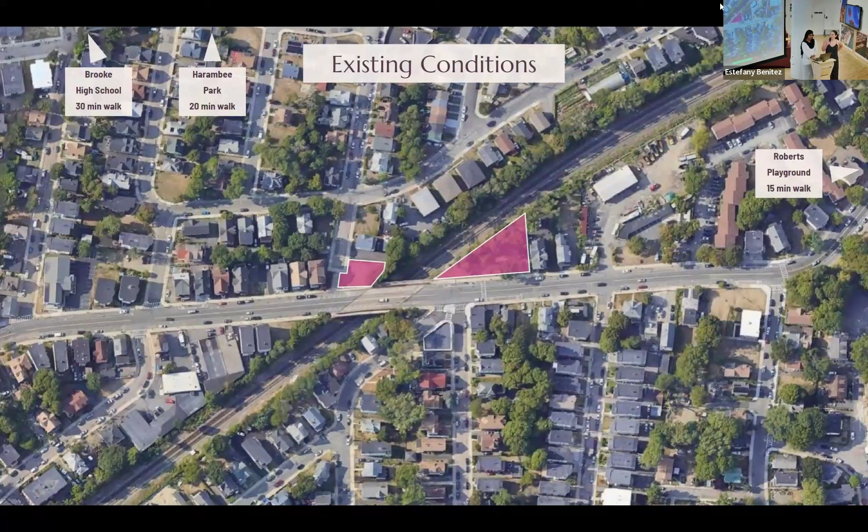Moving on to our existing conditions. As you can see, our site is labeled in pink. We've labeled 3 areas around that are important in the neighborhood: Roberts Playground, Harambee Park, and Brooke High School.

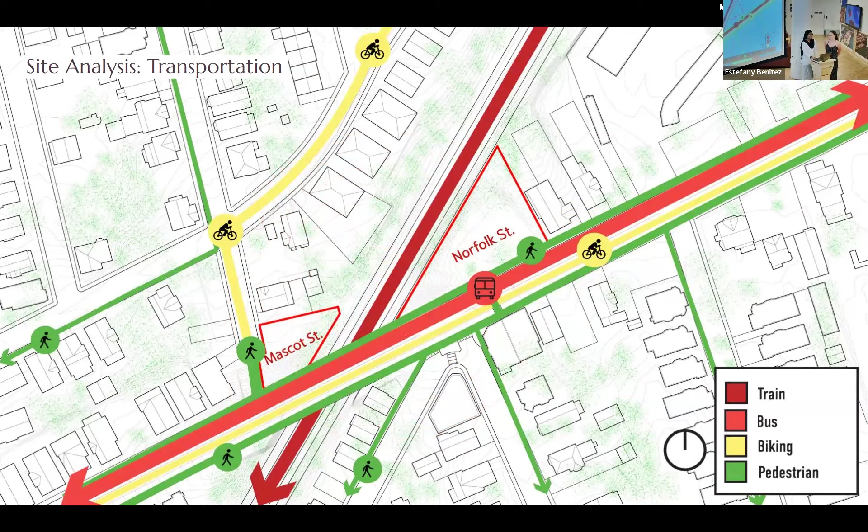We also looked at transportation of our site, and for Norfolk Street, there's a bus stop right outside of the site, as well as accessible bike lanes and sidewalks. And for building types nearby, there are a lot of residential areas that we wanted to tap into to give a community vibe.

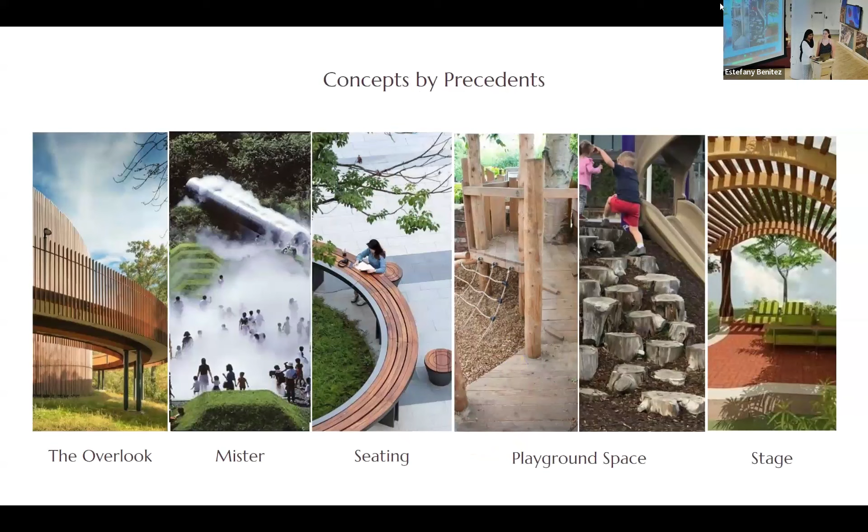For our concept diagram, we believe that education is our main focus for both of our sites, and it seeps into smaller things like the art, the kids zone, and the community events we want throughout both Mascot and Norfolk. And these are some precedents we want on our site.

Now going to our planting plan, we wanted to add trees where the commuter rail is to mitigate the sound, and also add fruits, veggies, and bushes inside the site to give a really cozy feel. Here's one of our renderings for Norfolk Street.

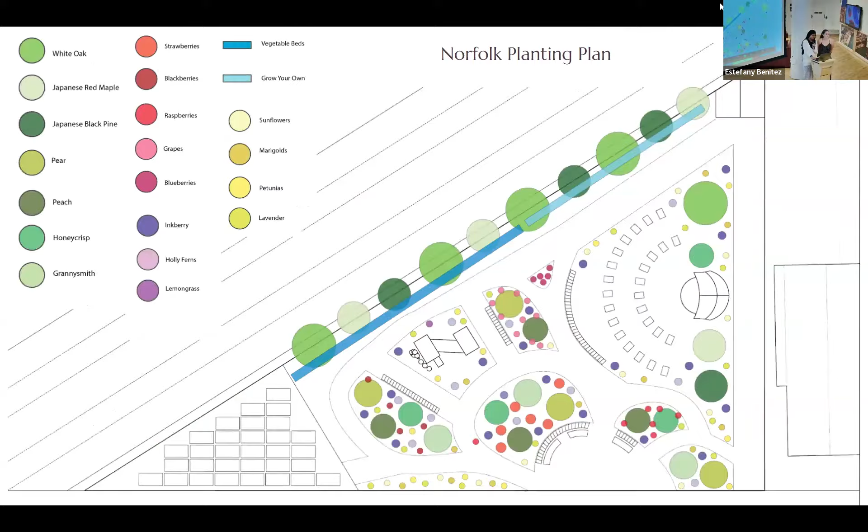As you can see here, we have our stage and a bunch of seating, plus the play area and solar panels we talked about, plus the trees I mentioned earlier.

As you continue through our site, we had our welcome area have seating and tables so people can take their plantings after going throughout our site and take a seat, and it would also be visible from the sidewalk for more people walking by to want to come into our site.

We also wanted to use a stage, and the stage would have a cone kind of shape so the sound would stay into our site and wouldn't bleed out.

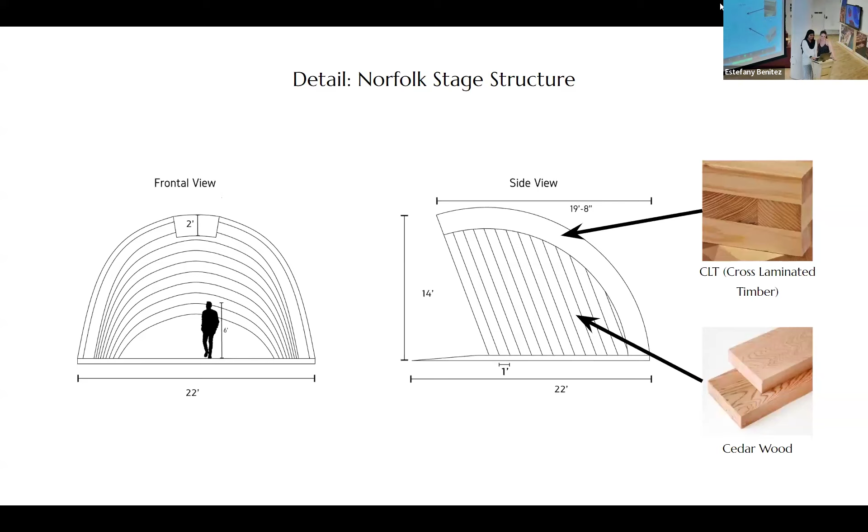Underneath the overlook is our plant wall and misting system. That plant wall is 8.5 feet high, made out of cork. That cork will absorb sound, and the height of the wall will block sound coming from the train inside.

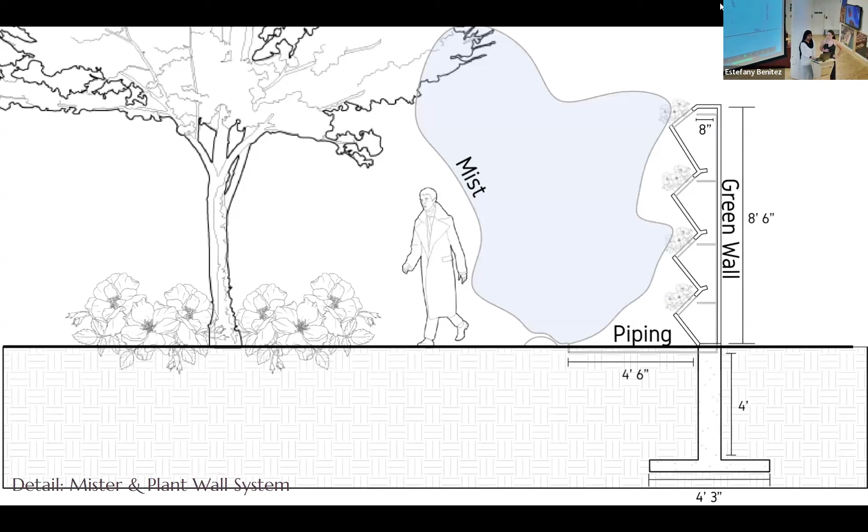There is an irrigation system within the plant wall or green wall that will self-irrigate and reduce the amount of human effort that has to go into keeping up that plant wall. In the winter, those pockets can be used for non-plants.

And this is the structure of the overlook. We have the base, which here kids above 5 will be able to stand on it to look through the other side. And we have up here the holder to hold for safety.

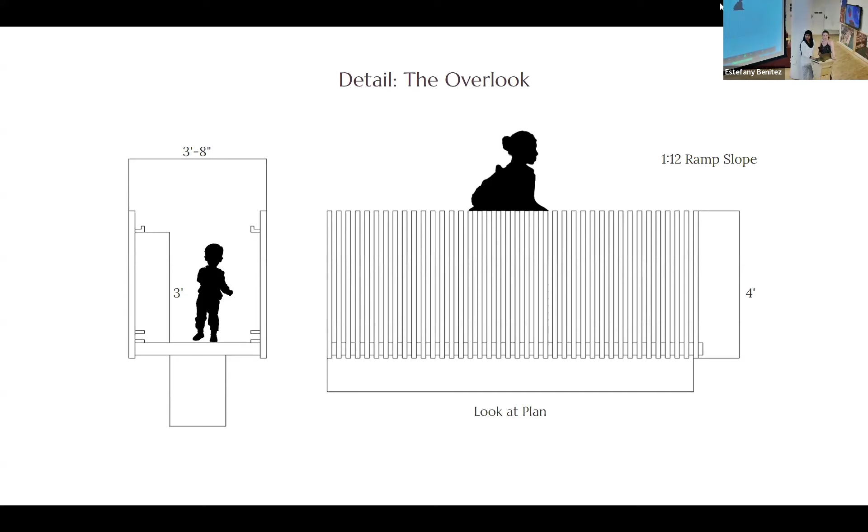And we have the railing, as you can see, it's spaced in between for kids below 5 to look through and see over all Norfolk sites for safety reasons, because we don't want them to climb up. And the slope is 1 to 12 for wheelchair accessibility to be able to move freely.

Going into conclusion: food is a common ground, a universal experience, and education knows no bounds and can engage different people of all ages. We hope that these renders and our site as a whole have embodied these ideals. By re-engaging both the plants and animals, we can educate the community and create a space that Dorchester can enjoy and use successfully.